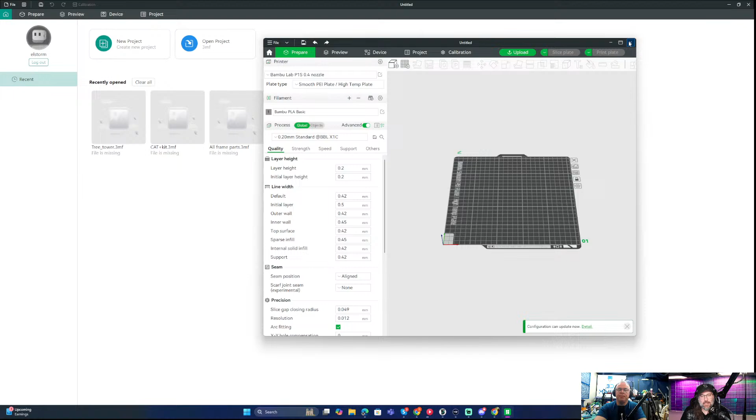So I'm going to close Bamboo Slicer here, and then go to prepare. The only thing I did on this screen for good information is I logged in. There's a login button in the top left, but once you go to prepare and actually select a Bambu Lab printer, so I'll select my P1S here, you can see a few things happen. The calibration comes back up top, and then the AMS options will appear.

The multi-material and stuff will appear in the filament area as well. Now, my network recently changed at home, so the IP address probably changed on the printer, so I would have to find it again. Yeah, it found it. It has all the AMS options in here and in the slicing.

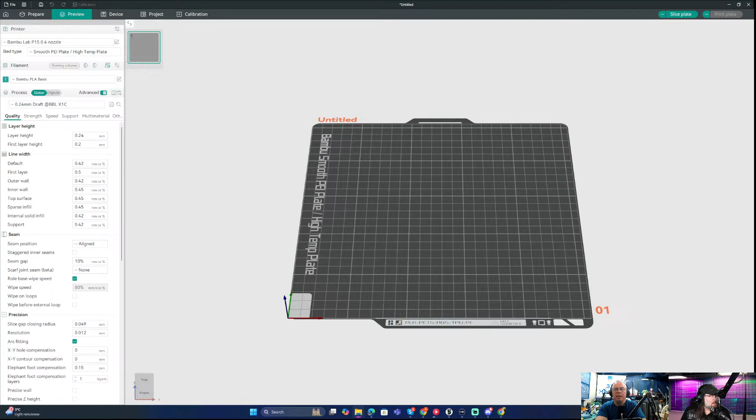So if you had objects and you wanted to bring them in, it looks very super bamboo, right? And that's why it's almost 100% bamboo, but not quite.

So you can see the STL file that I downloaded. It's okay for the ornament. However, it doesn't have all of the coloring information that we put into it. Where did I put that screen? Here it is. So if I wanted to maintain my color, instead of downloading the STL, I would download the 3MF.

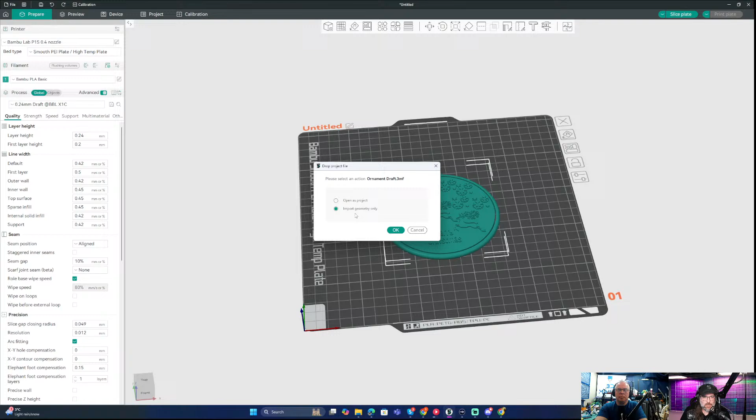Now, there we go, perfect. So I'll just grab that and bring it right into the slicer here too. I'm going to import the geometry first to show what that one does. So I imported the geometry only, and you can see now that yes, it does indeed have my colors.

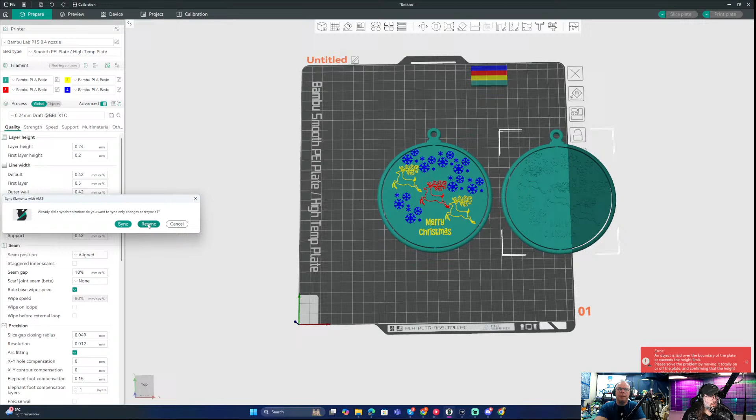And this goes back to Greg's question: does it pull the colors in the AMS? It sure does. So what we can do here is much like Bambu Lab, where for the filament you just select the resync. Yeah, so I resynced my filament list from the AMS, up here on the filament. So the colors we see now are the colors that are actually in my AMS. I have blue, green, purple, and black in my AMS.

So obviously if I was going to print it, I might change it, but yeah, it does have the same options. So if I come back here and go, I want my stars not to be in purple, I want them to be in black. I can come in here, select them all, right click, and then select a different filament. So just for fun, I'll pick generic PLA and see it changes the snowflakes to white.

The reason it gives you 5 on the Bamboo Slicer is because you can have that external spool, but I don't use that. No, you can't use external with the AMS, but that's why they have the other option if you unplug it and just leave the connection in. So I'm going to still make these - I think they were purple, so let's just leave it at purple. So syncing to the AMS is possible in Bambu Lab.

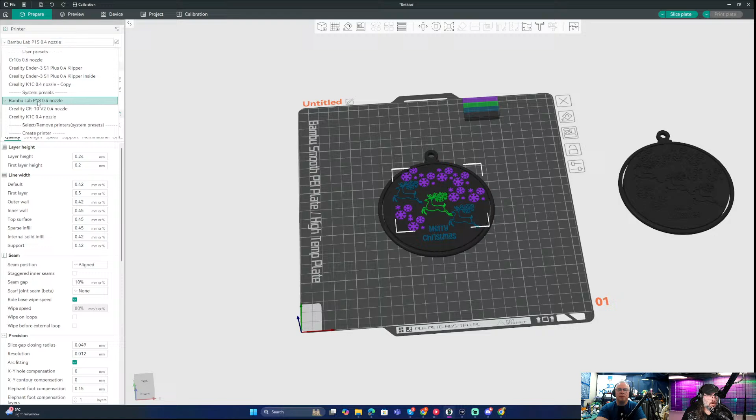So as if I take away, once I change the printer type, it changes and I get the Bambu Lab calibration and all the device stuff. I can start the cameras, I can start the light, I can do all that stuff from Orca. The nice thing with Orca Slicer, much like Bambu Studio, is once you sign into your account, it saves those custom printer settings too.

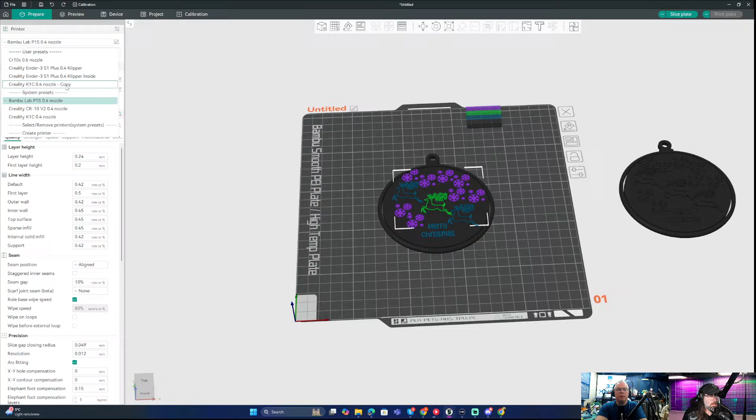So once I sign in and make a change, I'll do an example here. We have a Creality K1C, but one thing that Orca, Bamboo, and Creality all do is try to put a brim on everything. Everything gets a brim. Oh, the auto brim, and I hate it, so I turn it off. I turn that off too, and then saved it as a custom printer, which is this K1C copy.

So now my K1C, I do have the networking all hooked up to it. So you can see that I've actually unlocked the firmware on the printer so that it can use Klipper.

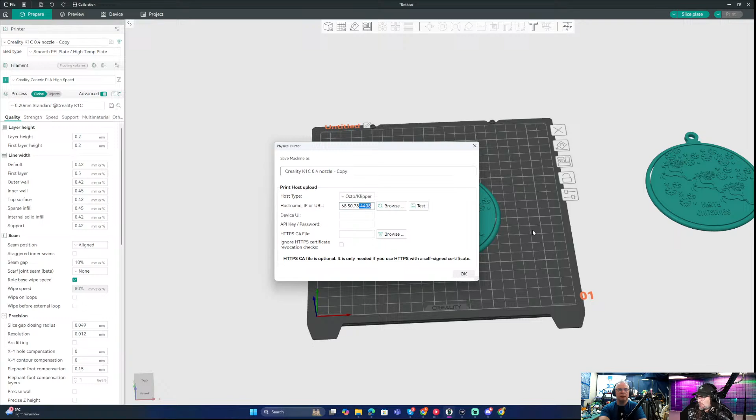Excuse me, sorry. So if I wanted to browse to the device, I can now. Maybe my IP changed again, which it probably did. Sorry, I just switched everything.

You can see too that if I switch between printers, if it doesn't have an AMS, then it flattens the STL into one color again.

Now the cool part, and the reason this is called demystifying - out of the box, Orca, Bamboo Slicer, and Creality Slicer will all do great jobs for their printers.

I really enjoyed Bamboo with my Bamboo printer. And here's the thing, I do too, but Orca Slicer is Bamboo Slicer - it has all the same feature sets and a few more. Orca exists because somebody wanted more features, more settings, so they added more settings into Orca, and cloned it from the repository and made a new one.

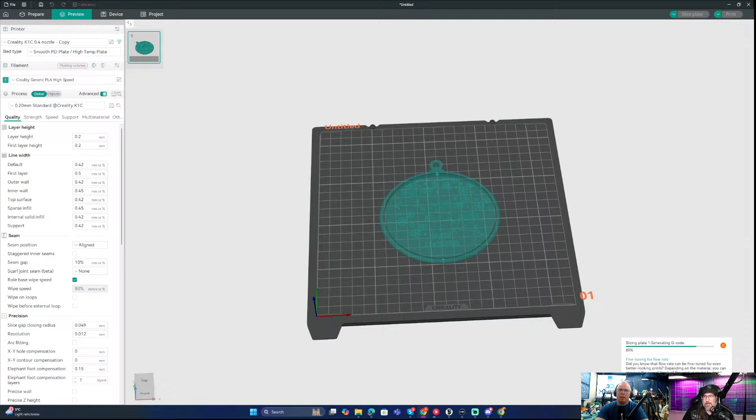But didn't Orca originally start out cloning Prusa, not Bambu? I don't think there was a version before that, but I could be wrong. I don't know, but then when Bamboo came out, they were like, oh, we like this one, this is more in line with what we're doing anyway. I'm not willing to put my statement behind that - as far as I know, it's always been.

Let me see if I can look back. Which was the other one? Because there was another one that was a clone. If I go back, that's version 2. Super Slicer is probably the one you're thinking of - SuperSlicer was a fork of PrusaSlicer. But as far as I know, Orca has always been a fork of Bambu.

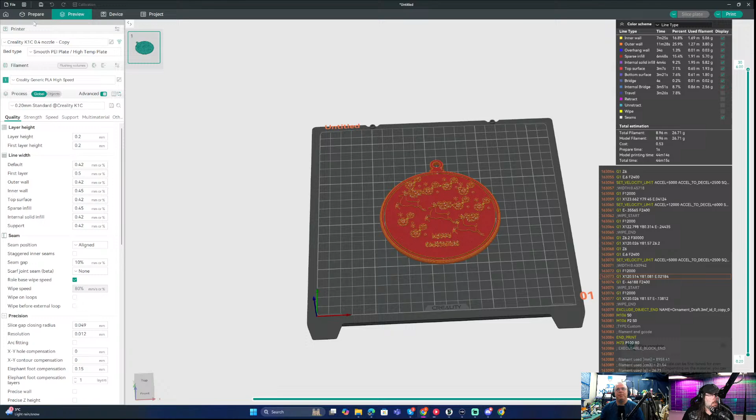One thing to note, if you Google Orca Slicer, it does not have a website. They probably just have a GitHub, but there is a website out there called the Orca Slicer download floating around. It's been out for a while - I don't actually know if it's good or bad. I know I wouldn't use it because it's not the team from Orca Slicer, it was just some people that made it and put the installers up on the website. So I'd rather go to the GitHub for one, and if the author hasn't made the website, it's very hard for me to trust the website too.

But that being said, Orca Slicer is a fork and a great fork of Bambu Studio that has all the features of Bambu, plus more features, like from Creality, and beta features like that.

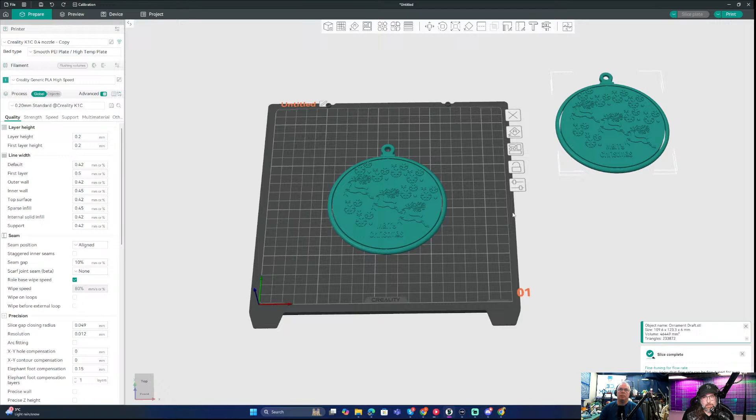The other positive thing from Orca Slicer is the printer support - there's more in there, but the other neat thing is the fact that there's very little a person has to know to print in it. You don't have to be a professional, you can just click.

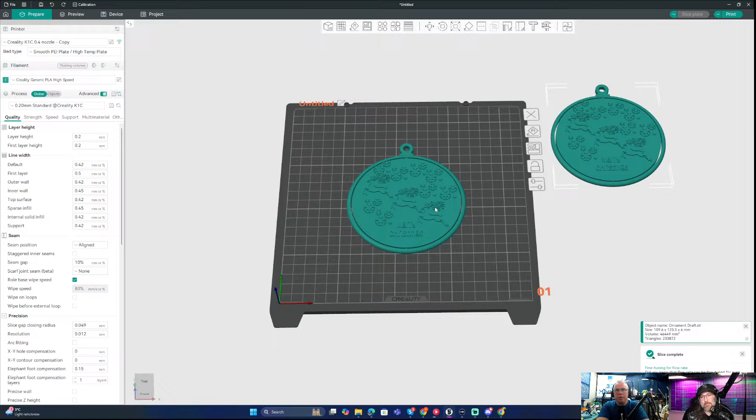This is more universal for all printers - that's the other selling point. Because even though you can add other printers to Bamboo, this one has a lot preloaded that are more than Bamboo has. Yeah, this one has many more - again, that's all up in the printer setting widget up here.

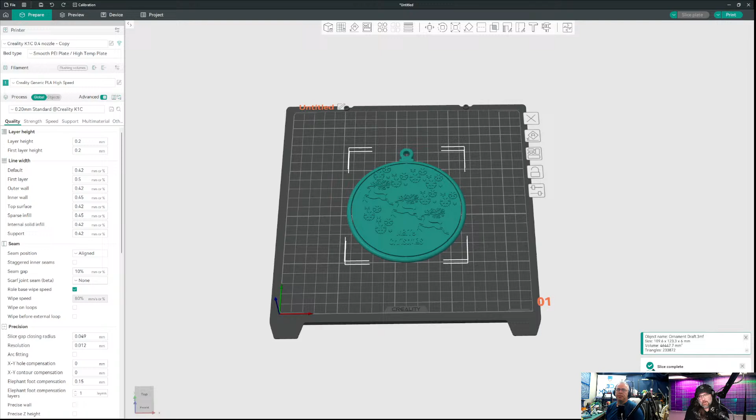I clicked it, so it's probably a little bit frozen right now. Yeah, the dialog box could be an opening advantage - like if you run a fleet of printers that are a mixture of Creality, Bamboo, and whatever, or if you run a farm, or you're just a 3D printing nerd and have a lot of printers. I don't know who I'd be referring to - it's not us, for sure, it's not us.

It's us. But yeah, the brand selection - my little scrolly finger is now gonna go so much farther, right?

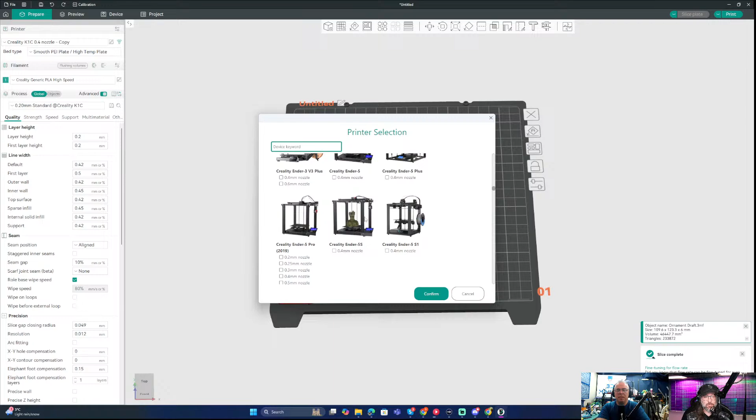Like Creality, even though it's listed in Bambu Studio, there's tons more printers inside of Orca Slicer, and it works the same for printer profiles. You can update the profiles as it's open, but like anything under the sun. It's a single pane of glass, and you can print now. You can still do custom and whatnot.

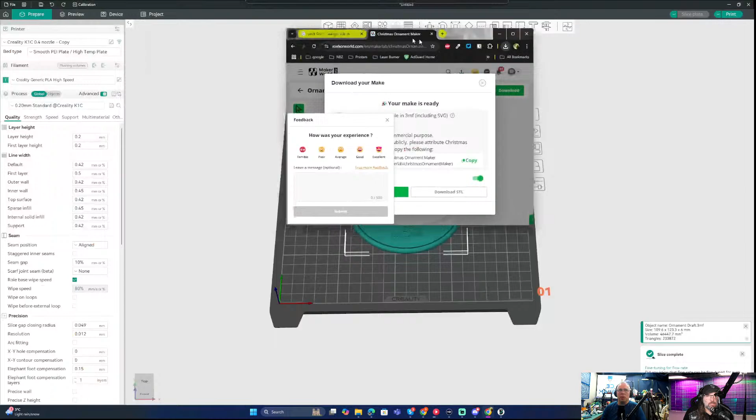The only benefit with selecting a printer within Orca would be you'd have some preset settings that are probably tested for your printer. My Bambu printer works great with my Bambu slicer, but if you take a non-Bambu printer and make a custom printer in the Bambu slicer, you're going to have to play with a lot of settings. Whereas with this, you have a lot of settings already preset that are probably known to work for your printer. Orca does have very good support for that — the printer profiles have been tuned, and in fact we can say that in general about new slicers, for the most part they just work.

Now I'm going to grab this model. Whoa, it's Darth Vader, y'all. So let's download the 3MF — thank you so much. So here's the file. It was a package deal — Christmas Vader, nice. So let's extract this.

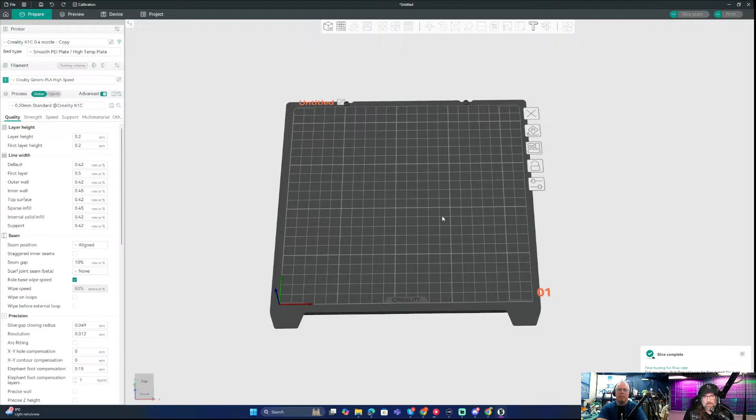And then we'll shrink this, let's get rid of this. So let's bring this in — you can see here on the files, my Christmas Vader comes in 5 plates. So does it import the individual plates then? If I just do this, it will just load them all onto one. I'm pretty sure it loads them all into one, but we'll find out — we'll talk about that once it loads.

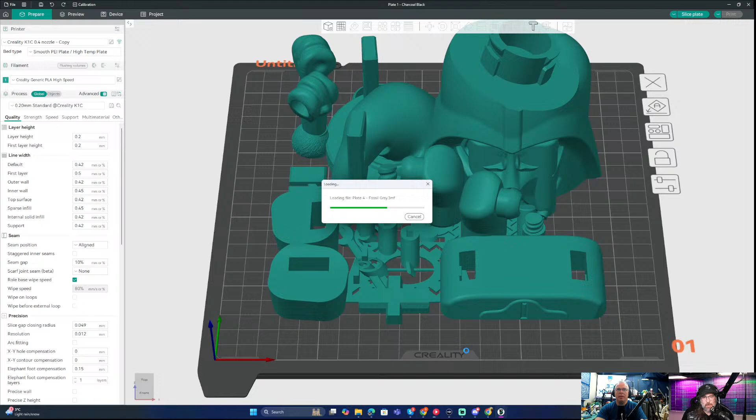Well, bam — so yeah, it loaded plate 1, and now we're on to plate 4. Yeah, it's just stacking them all on one plate. But that's not necessarily a bad thing. Let me delete these.

This came from Thangs, straight from Thangs — it's releases for general printers. So let's just do this: plate 1, I'm going to put my plate 1 and drop it here.

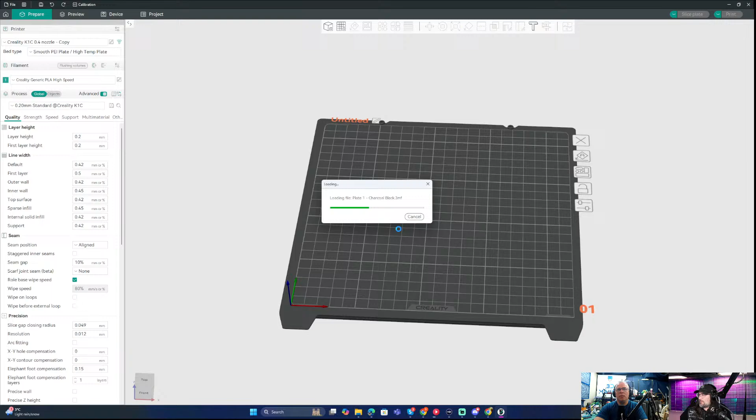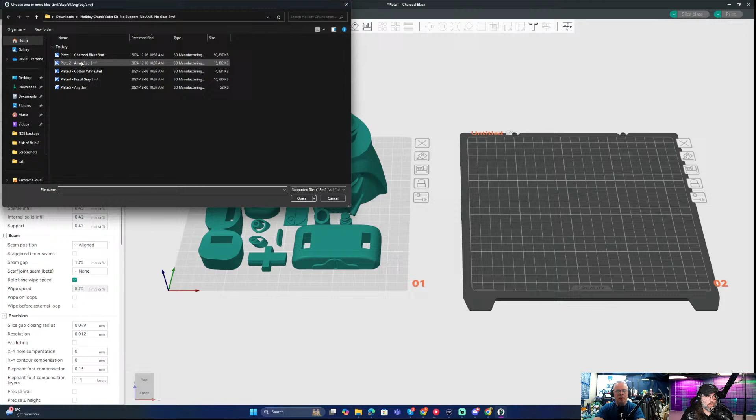That's one thing I do like about Bambu — if you're doing a project and need to create multiple parts with multiple colors or materials, having multiple plates is a very nice feature. Along the top here, you can add plates to your project now. There's a box that lets you import a model. So I could just import plate 2 now, go import geometry, that's fine. Since I added a plate and it's selected, it goes to that plate, so I just add another plate and drag this one in. So plate 1 could be all your black parts, plate 2 your red parts, plate 3 your white parts, and so on.

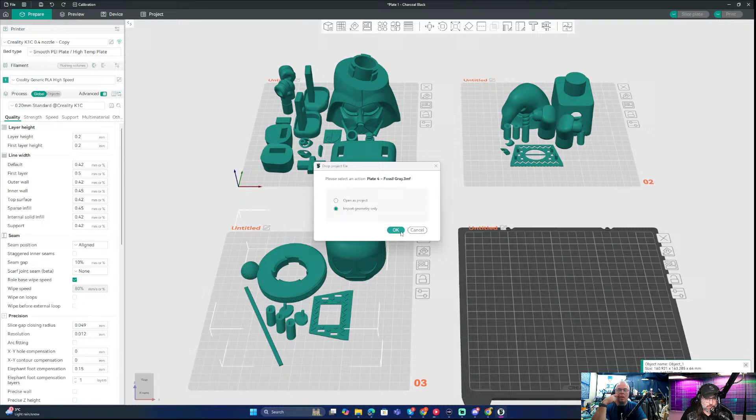I didn't read the directions per se, but you're right, because the files actually have the color on them — black, red, white, fossil gray, and then the 5th plate says 'any.' So we'll just add this as a plate, and the 5th plate says any.

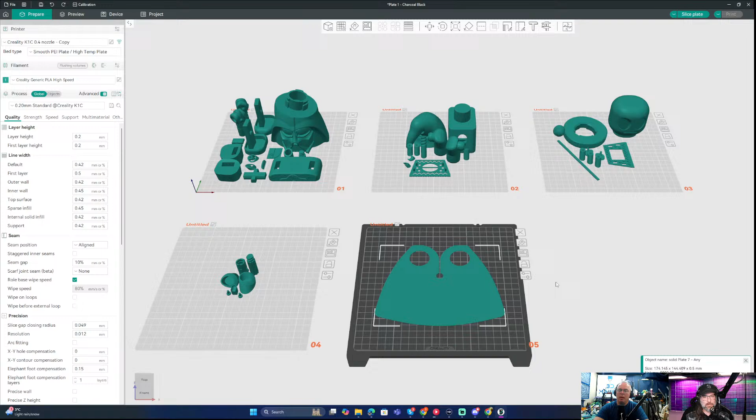Now there's a warning here, and it's true for Bambu Studio, Orca Slicer, and Creality Slicer: the more plates you add to a project, the more memory it takes up to run the slicer. That should be pretty obvious, but you run more of a risk of crashing.

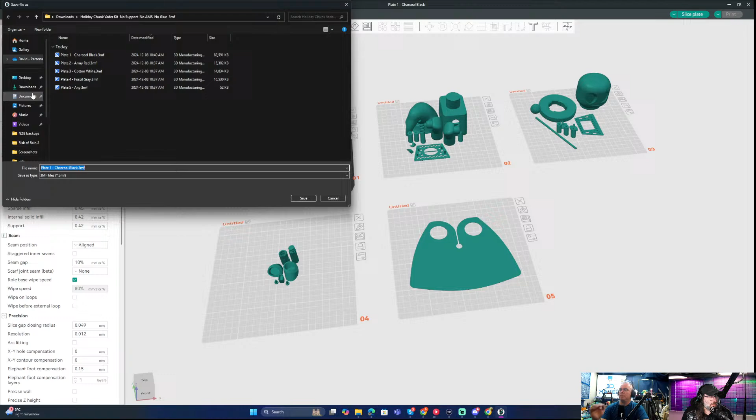I want to know where this is, so I'm just going to save project as. Yeah, it did save it as charcoal black. I'm just going to drop it in the downloads folder, which is perfect.

The models are all on different plates now, so when you use the slice operation, all you have to do with this model is make sure that the plate you want to print is the one highlighted with the black edge. This is identical to how Bambu works, and yeah, Creality Slicer has a similar feature set.

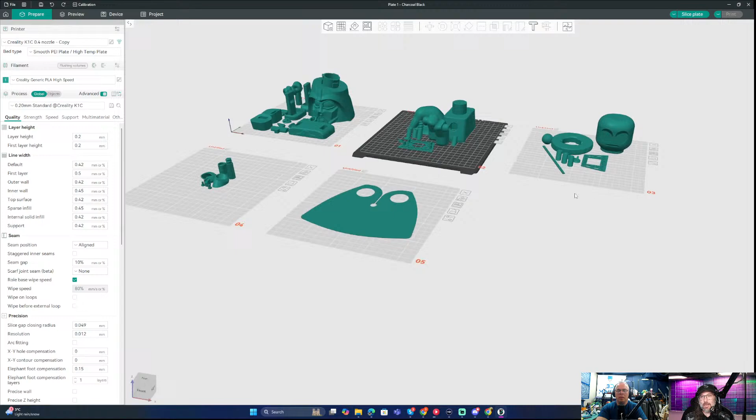Now, you still have to do the same pre-flight checks yourself. The slicer will help you out for sure, but you want to take a quick look at this. Keep in mind, we haven't played with any settings, we just loaded the plates. Let's take a peek and see if this is going to print.

I don't see anything crazy. I'm just turning this part here, and I'm not seeing anything that would prevent it from printing. Just these arm nubbins, I think, on plate number 2 - they look like they're floating over air.

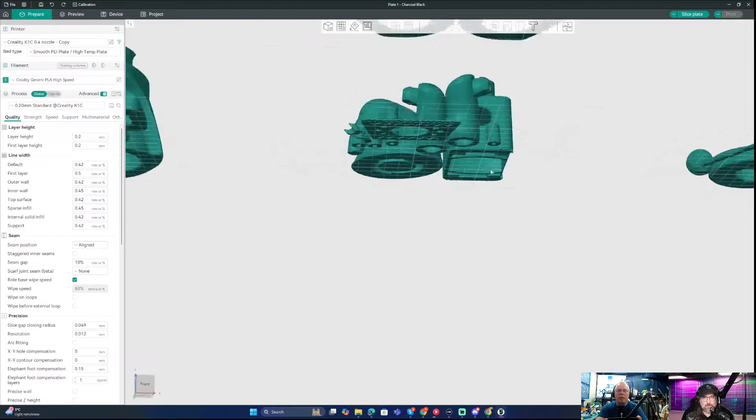Are they 45 degrees? No, but they are angled off the model, so they might print. It looks like they tried to make it print without supports. But let's go read the instructions on the model - there's definitely an angle there.

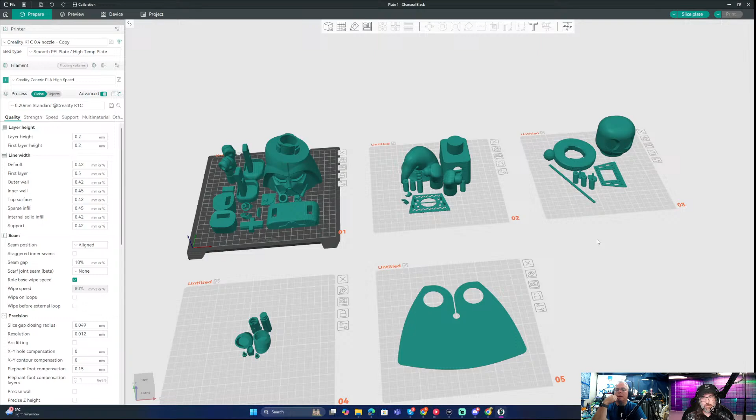It says, as with all of our models, this prints with no supports. So the fact that they took the time to separate this into plates means they probably oriented it for you correctly. I really like those models - those are the good ones.

So if I slice the plate, you can see that now it's slicing just this one, and it gives me the time estimate, much like other slicers - going 2 hours, 29 minutes. You can see that this one does have the auto brim on.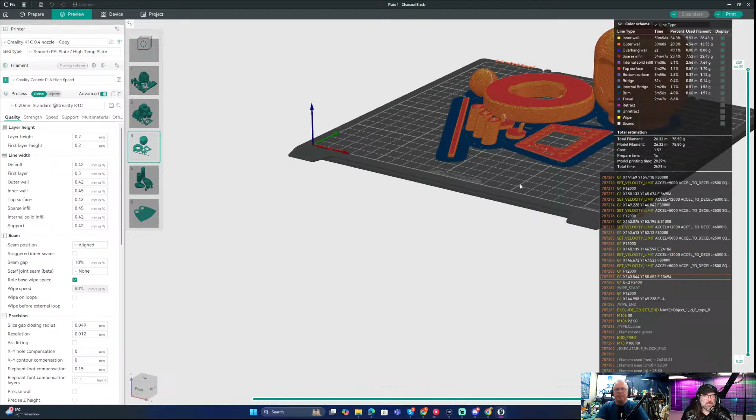So the first thing I would probably do is go in and shut it off. Now, one reason for the auto brim isn't necessarily that the model needs it, but the printer prints so fast these days you don't want skinny things to fall over - the brim helps those things stick to the plate.

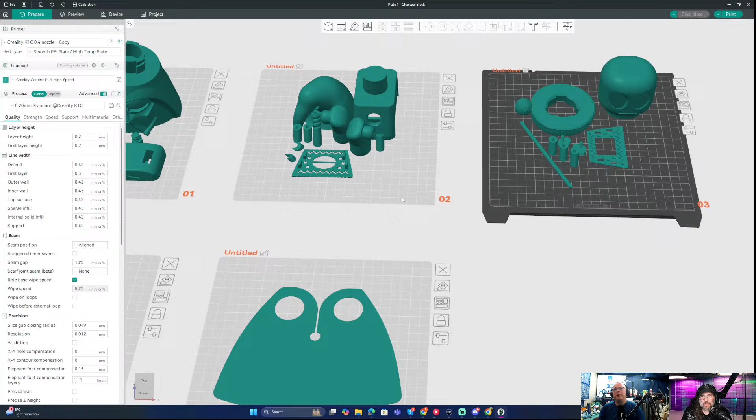So we managed to get the plates in, and we have all our models here, which is great. If you drop this down, you can see there's a slice all option, and what slice all does is take every single plate and slice them - it'll freeze and chug for a while. Very, very freeze, yes, you should be careful.

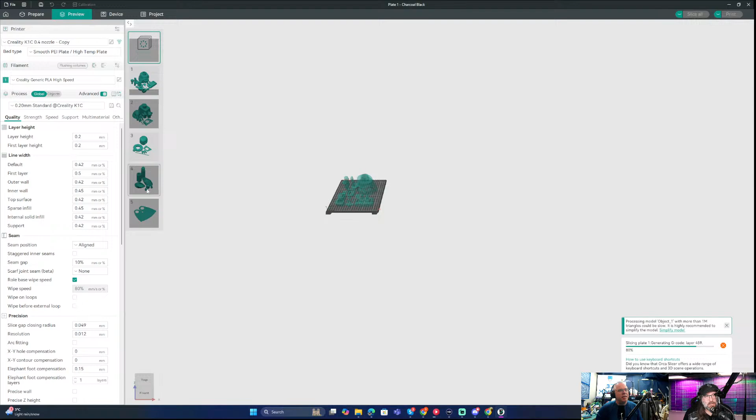It gives you a status window too. When I did the lithophanes, it does two plates - one for the lithophane with its little built-in stand, and then one for the actual box. So if you slice all, it chugs for a while.

Chugga chugga chugga - the cool thing is the operation finished. It's telling me the total print time for this whole project is 12 hours, and the total cost based on the filament estimate is $7.

But you can go through and click these models, and then you see the print option comes up when I get off the actual description. So now everything's ready to print. If you're ready to just go with a project, you highlight one, hit print, highlight the next one, and away you go.

Now, the only reason that kind of sucks is if you have to close your slicer or something, then those don't stay sliced and you have to reslice them. So it's really up to you - I usually just do slice plate, because I only have one K1C or one Bambu.

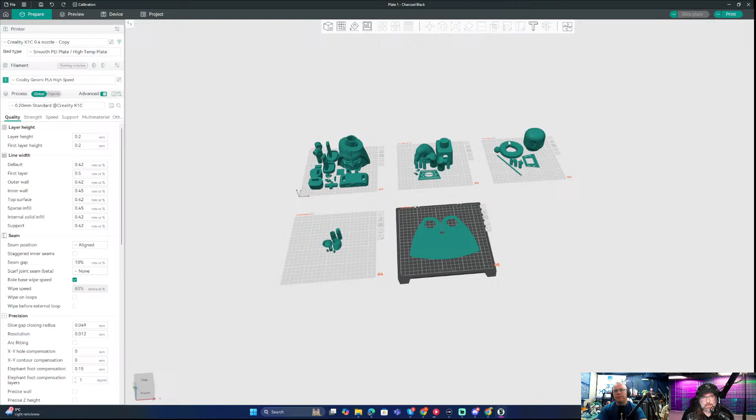But this model will print, it'll print pretty good. I don't see any support issues, and again, none of this needed any intervention by me. One of the biggest things used to be like, oh, I need to generate supports because it sucks, right? Well, that's pretty easy to do now.

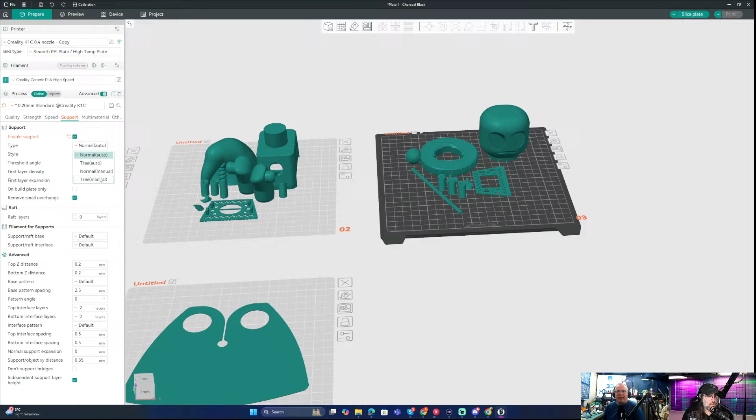The slicers here, if you just click the support tab, you enable the support, and now everything - pick tree auto - everything has tree supports now, which is awesome. Slice, and once you hit slice, again, I had no user intervention other than clicking enable and changing the option to tree.

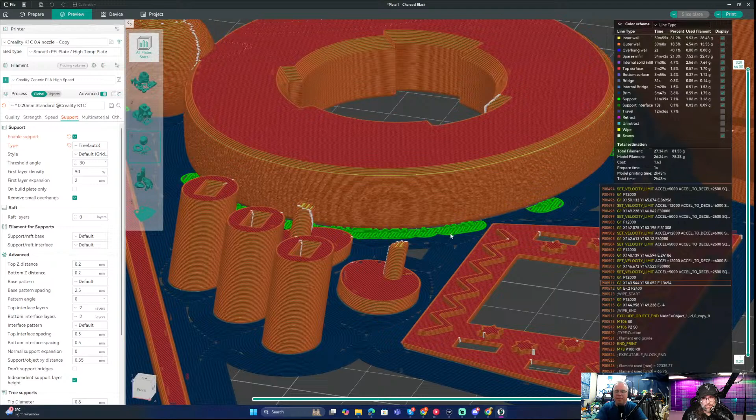Let's see what it comes up with for this plate. My favorite support - yeah, see, tree support. The head didn't need any, but you can see it tried to generate some around this ring. That's the green stuff here.

And then it also generated support around the little ball. That's interesting, because anytime you get a sphere, it's hard enough to print where support's a good idea, because it makes the walls smooth around the curves.

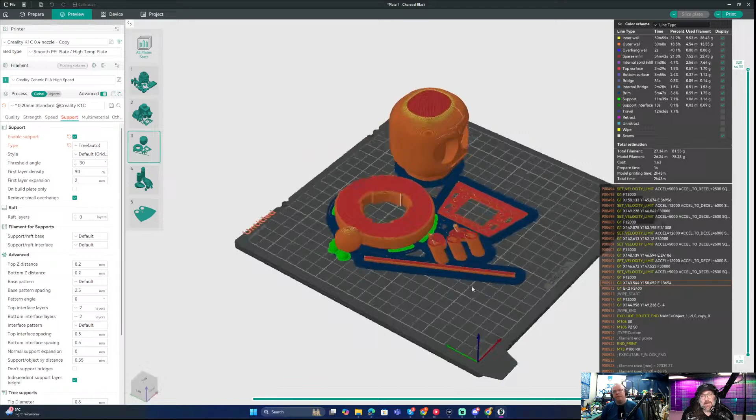Again, the guy's right when he says this model doesn't need support, because it barely generated any. It did put support in the head a little bit. If I drag the preview down, you can see there's a tree support column in the middle of the head, which you don't need to have.

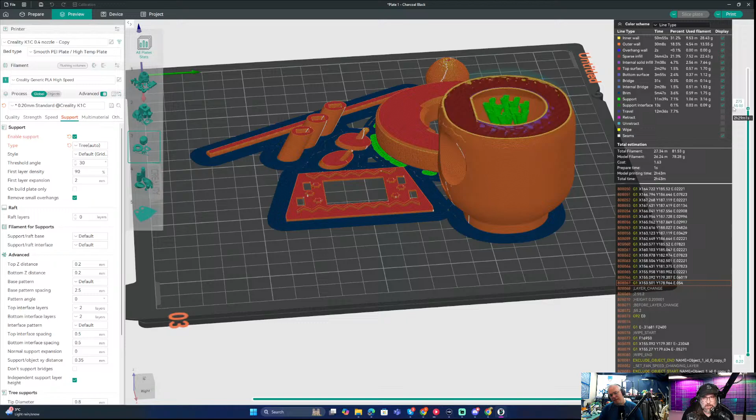Because when you look at this model as it goes up in layers, as I drag up here, it actually cones at the top. So it's actually going up on an angle that's very printable for a printer, and that could be bridged no problem without needing support. Well, I don't even think it would get to bridge, because it's angled straight up there.

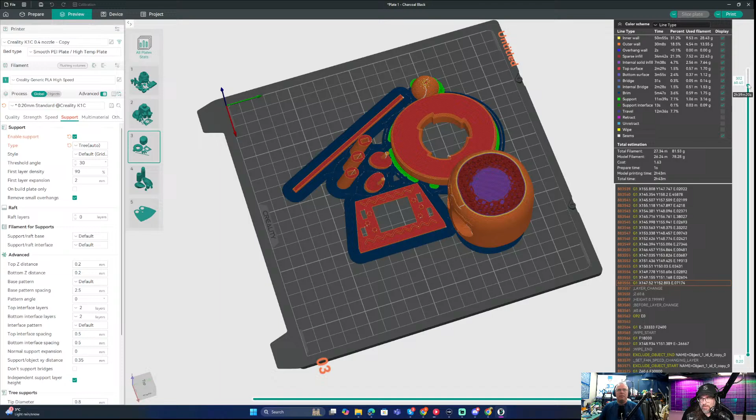It would bridge that flat layer just before it curves - an internal bridge. So at layer 301 it will bridge, and then it finishes off. You get some of the little droopy lines, but it's inside, you're never gonna see it, so it doesn't matter. At that depth you wouldn't see droop, that's pretty low key.

So again, we added support when we didn't need it. If I take it off, which will be fine, it takes the model preview away.

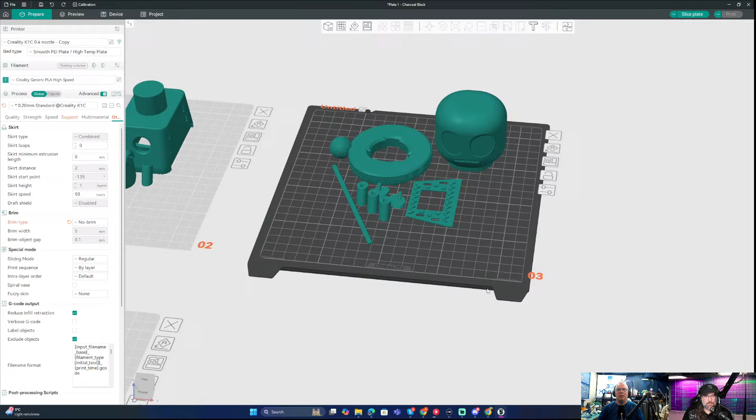And one of the things I hate most in life is the auto brim. If I come back here, turn that off, and then I just change it from auto to no brim. Again, that's nitpicky. There's only 3 settings you got to remember: enable supports, enable or disable the brim. Brim is great if it doesn't have a lot of surface area. If it does, you don't need it. And that's it, and then slice.

The default settings for speed and heat and filament types are all done when you pick the material type up here, and then the nozzle and the printer. The profiles are adequate to print the model quickly, and with great success too, right?

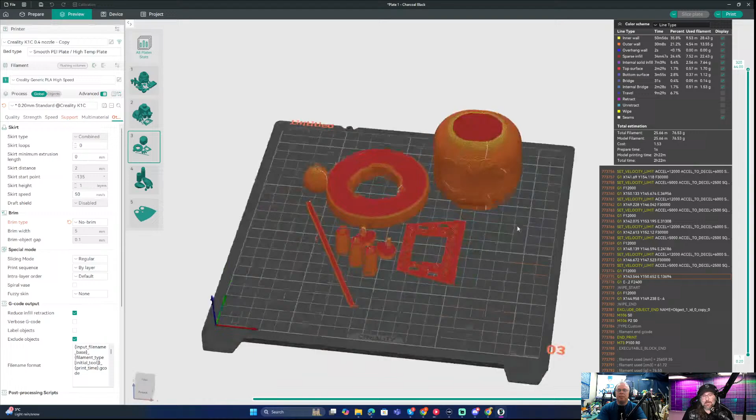So you can see, I'm gonna have to print this model, David. Well, if a certain wife is watching this one, I think she'll want it for her desk. So it might happen today.

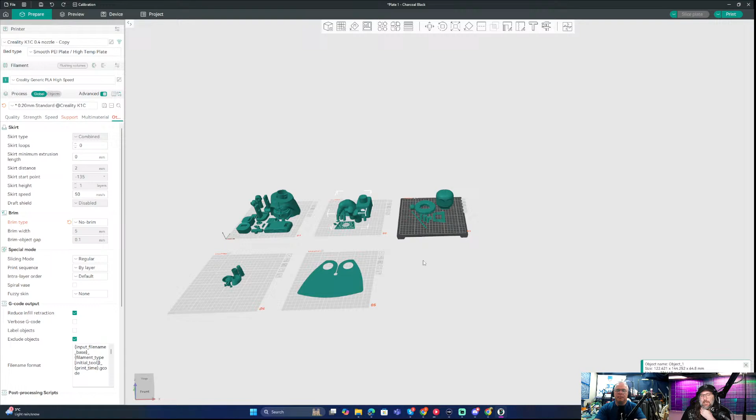So the Vader, it's a cool little model for sure, but very printable. And I like the way the plates have been separated in the files. This one's the charcoal black, this one's the gray. They did a really good job in the model making of this, but also for printability, the slicer can definitely handle this. And when I'm ready to print, all I have to do is hit slice plate.

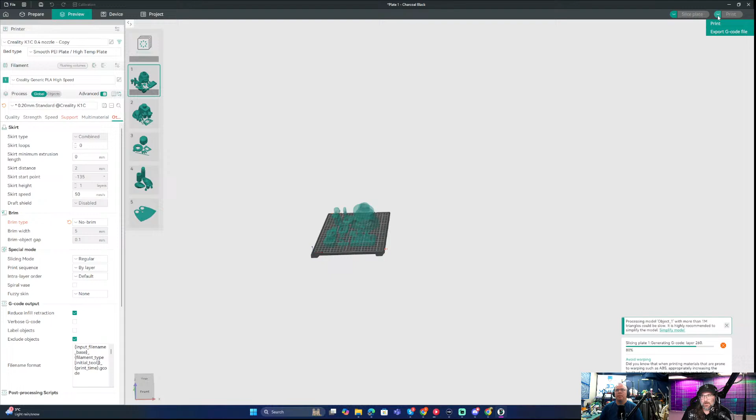And like I said, my IP address on the printer changed, so I'm gonna have to skip one step, which sucks. But once it slices the plate and I'm ready to go, when the devices are in Orca, all I have to do is hit print, and then it'll say do you want to upload the G-code or upload and print. And if I choose that one and the printer is working, it would start printing right now. Same thing goes with Bambu, right?

You got to your printer and showed the camera, so it must have the new... well, this one is a different printer. Oh, it might be actually 79 now. We can cheat, let's cheat. Hold on, cheat.

I'm gonna open the Creality slicer. Oh, I bet you it's not on, that's probably why, it could be. Let's not change the IP, let's just close that, I'll turn it on. A smart person would turn the printer on before browsing to it, so let's try that. Ah yes, smart plugs, just smart plug to the rescue.

I got to get my smart plug working for my Christmas tree. Yeah, smart plugs are good for that too. It was definitely off, the printer was definitely off.

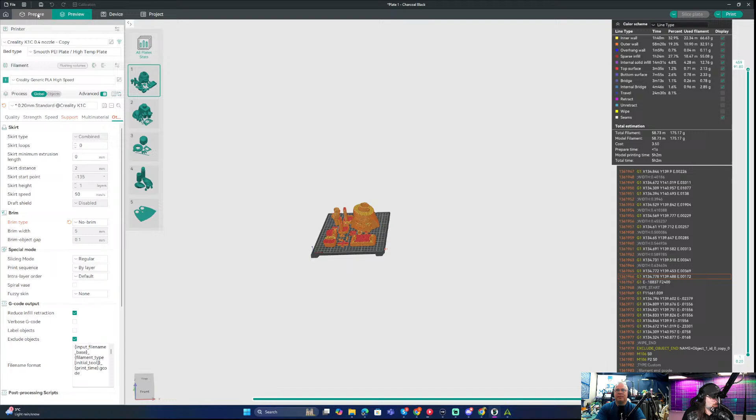I don't know if it is online yet, it takes a second for it to boot up the controller and stuff.

But the printing process is easy. There's literally download model, import model, maybe look to see if there's an overhang, and then hit print. I don't know if you remember the slicer videos of the past, but the steps have shrunk dramatically. It's not like a 30 minute process anymore. I can bring my whole plate in and just print, so it makes it easier for me.

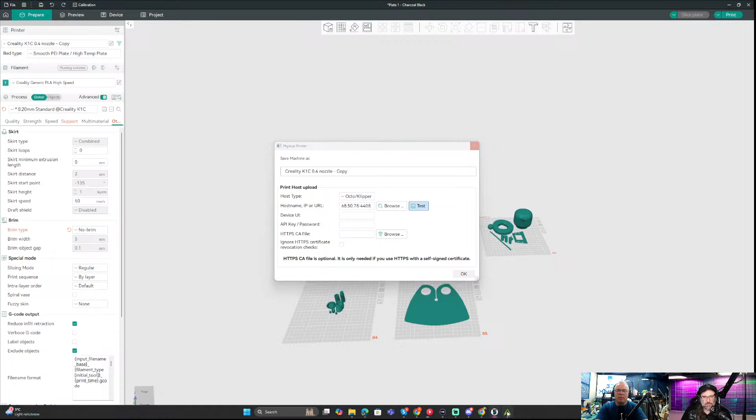This could be any IP address now. Let's see, we're cheating.

Device, scan, and then the Creality slicer will find the IP address for you. It moved up one IP... how dare you, I don't know why. This one keeps moving up an IP and back an IP. So now that the printer's connected, same thing.

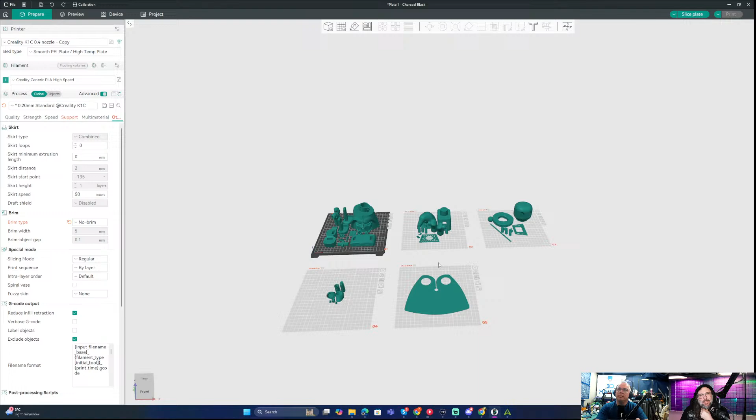I can go to my device tab. I see the filament information and everything. So then if I were to hit print, away it goes. And all assuming you have the colors you want. Right now that printer has orange, so that's not going to happen.

I mean, we need it to be red and white. Interesting, Darth Vader if he was like a safety Darth Vader to help you walk across the street. Make him a safety cone.

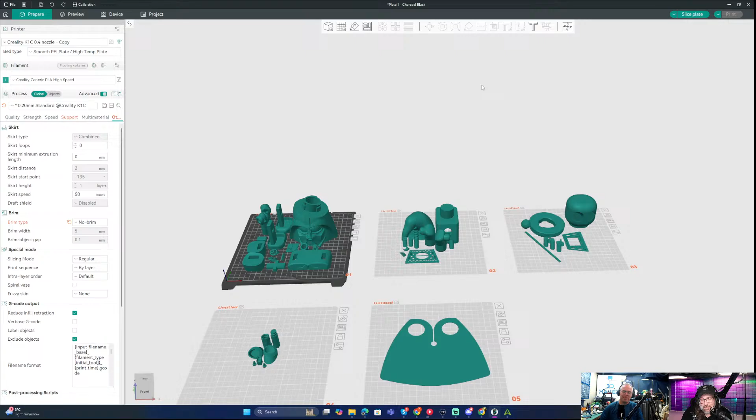But so there's basically all the things you need to worry about in Orca Slicer to get printing quickly. The printer support is fantastic. You just need to add one.

Honestly, I don't know, I have other slicers on my computer because sometimes you need to find the IP address and you want to be lazy, or that kind of thing. But once you have Orca Slicer installed, there isn't really a need to have any other slicer. It encompasses all the printers. But I mean, feel free to use whatever slicer you want.

No, they have to use Orca now. Okay everyone, start uninstalling. Yeah, get rid of them. No, I'm joking. Cura's no more. She's lying, I'm pretty sure Cura's still a thing. Yeah, I haven't looked in years. They're in beta right now on the new version. Yeah, I would not be shocked. They're still iterating, like 5.9, right?

What's great is all of these contribute to Orca or Bambu or whatever because of the open source community. So as long as Stratasys doesn't sue everyone out of existence, the community will stay going. I think they're fine as long as you don't cross them on the corporate side of things. But it's tough to know.